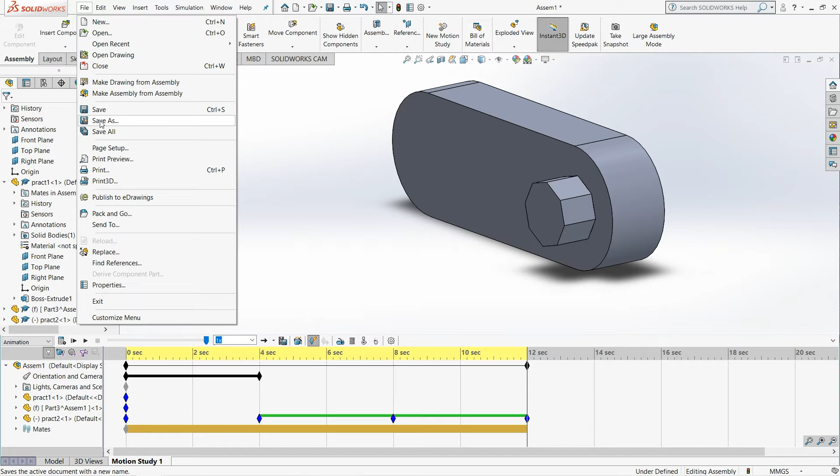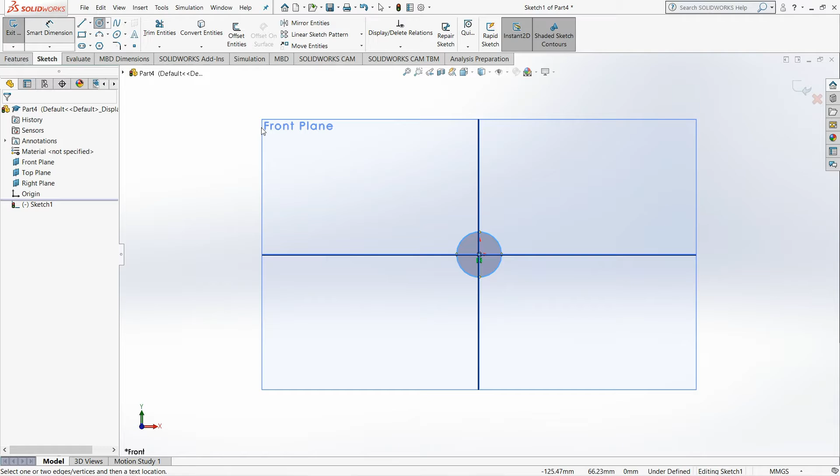Let's make the two parts and make the assembly for the animation. First I will make a base with a hole, then I will make the shaft, and then I will make the assembly with both of them. I am taking some arbitrary values, 5 millimeters for the hole, and I am just taking a base for looking beautiful with any dimension. My goal is to show you how to make a simple animation of a hole and shaft, like how a shaft inserts into the hole.

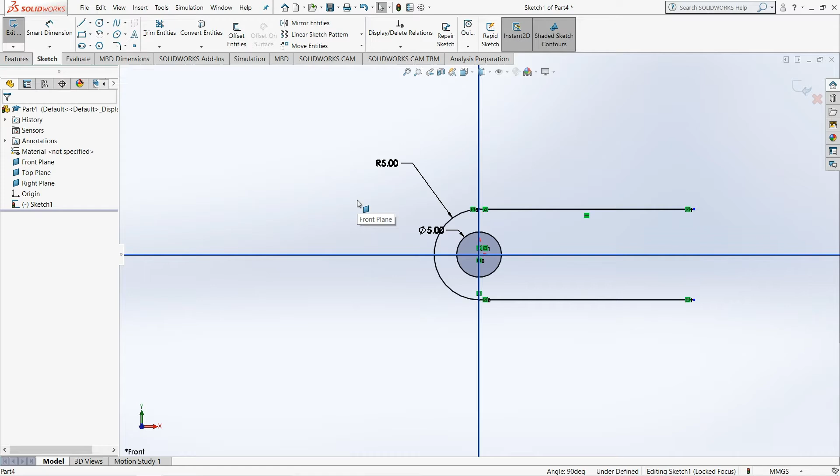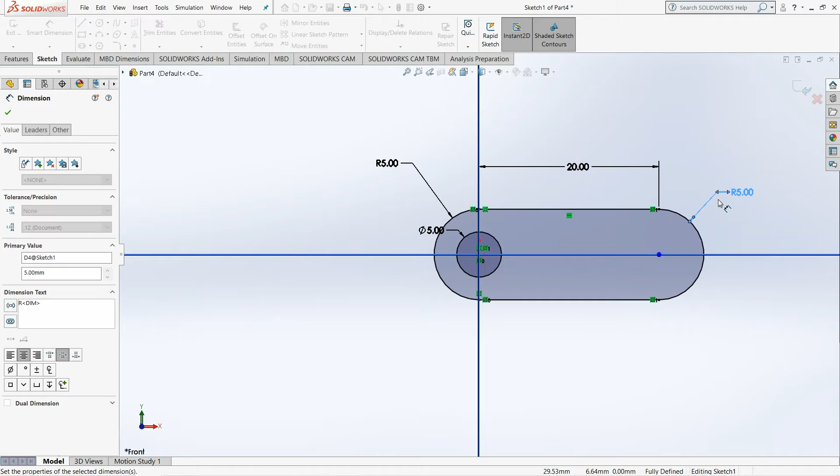Here I am giving the dimensions. I have made it mirror for making things easier. So my sketch is ready, it is fully defined. I can extrude this, I am doing 5 millimeters. So my first part is ready. I give it a name, any name, so I am giving it YouTube part 1.

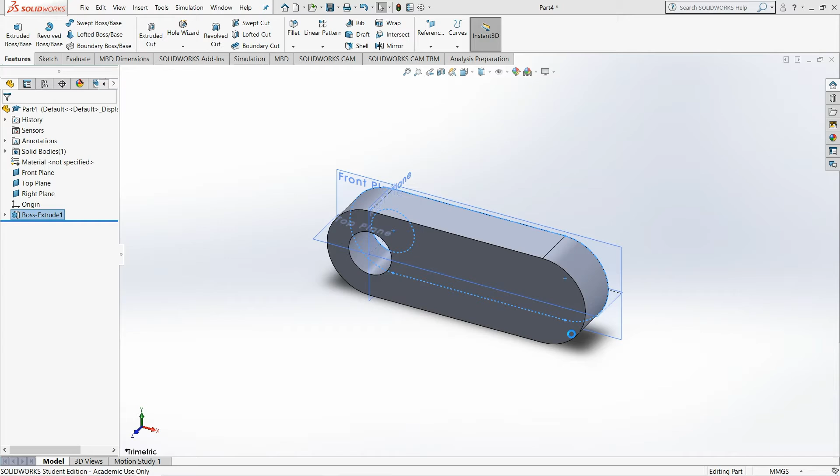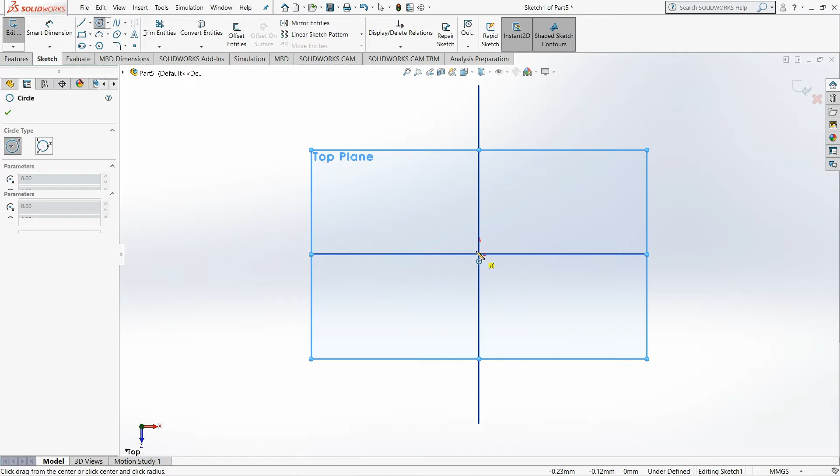Now I will make a new part for the shaft. You can also make bolts and nuts, it's up to you. I am just showing you for making things simple. I can give the threads as well, but I don't want to do them right now, I am making things easy. So the hole and the shaft will be the same size, so I am giving the value the same. Now I am extruding it to 5 also.

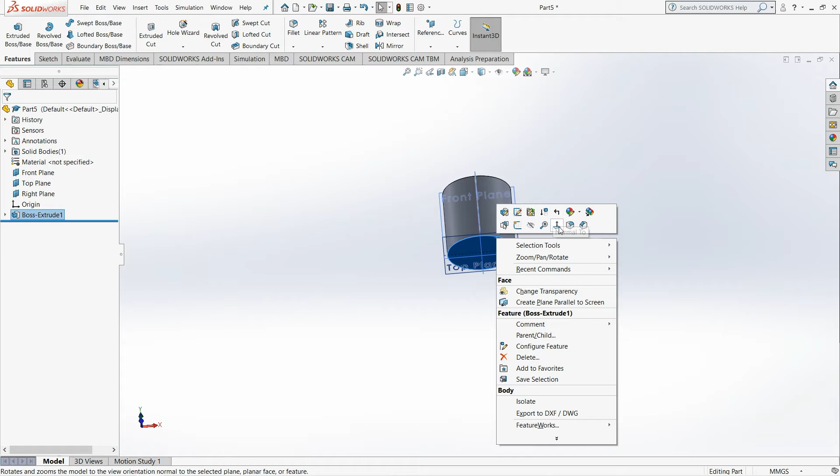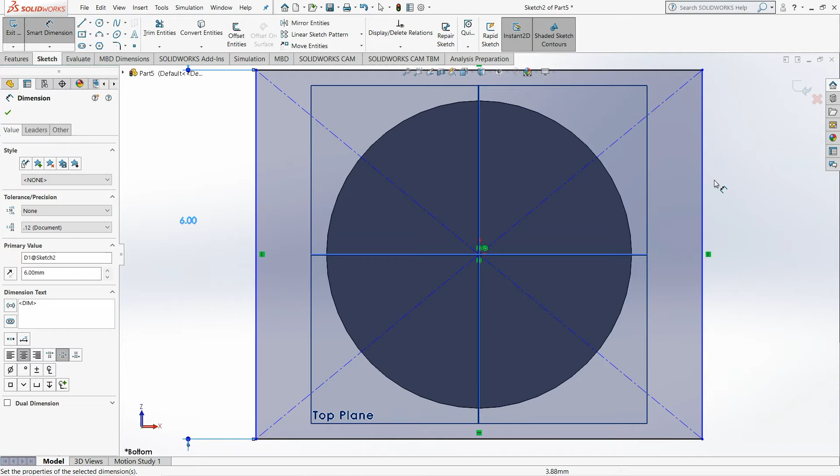Now I will make the head of my shaft. It kind of looks like a nut, but this is not a nut, you know, this is just for a simple animation. I'm doing some chamfer to make the head look beautiful.

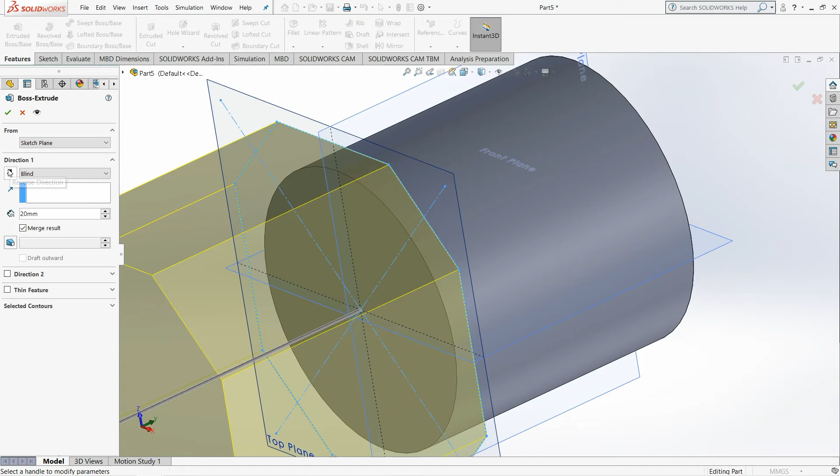Okay, my part number 2 is also ready. I am saving it as YouTube part 2.

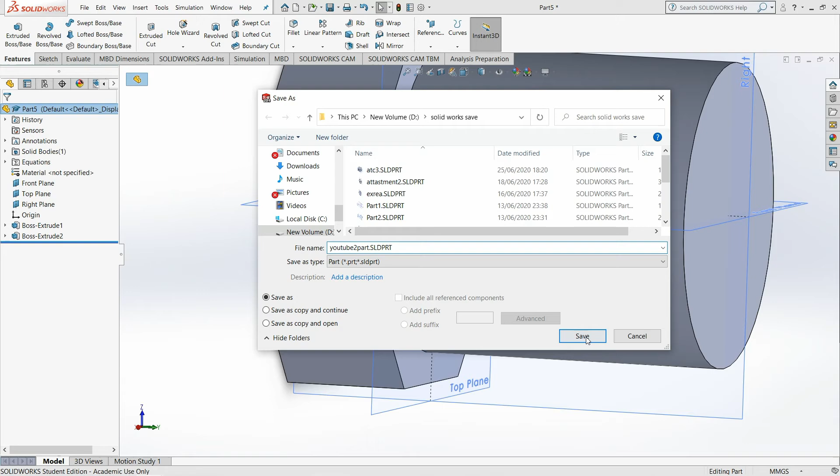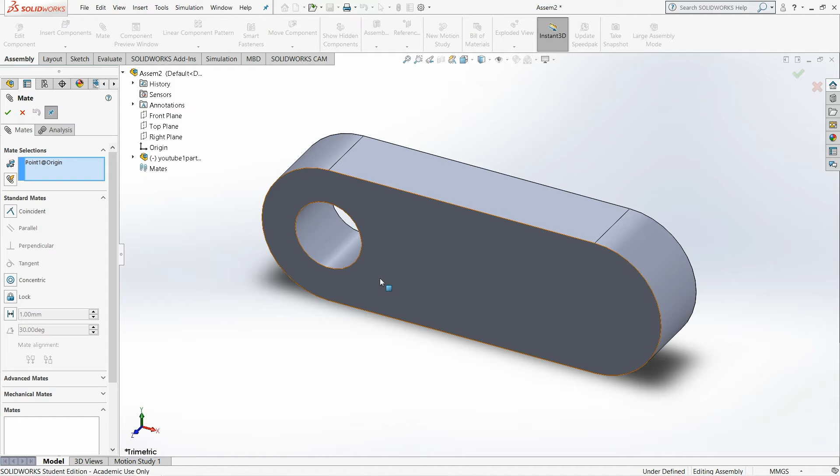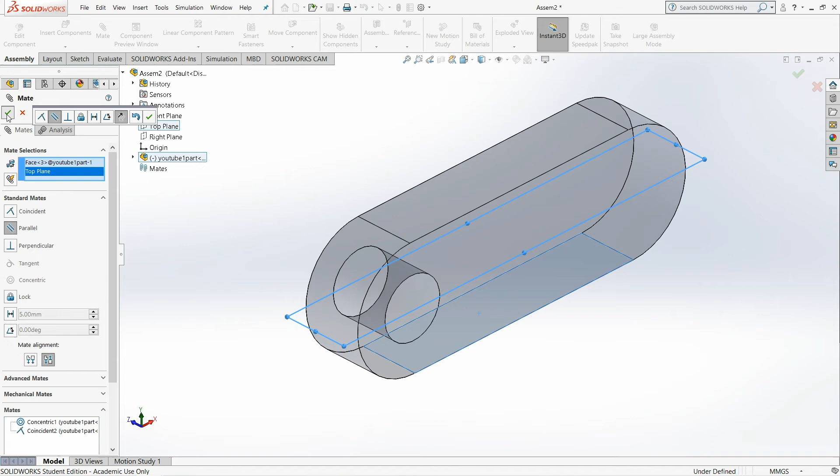Now I will do the assembly. For assembly I need to insert those components. The first part is fixed, so I need to make it float for moving it easily. Now I will make it fully defined as I want, like I will make some mates with its surfaces. See how I do it, you can do it your own way, it's up to you. These mates are really important for assembly. I think this is fully defined now.

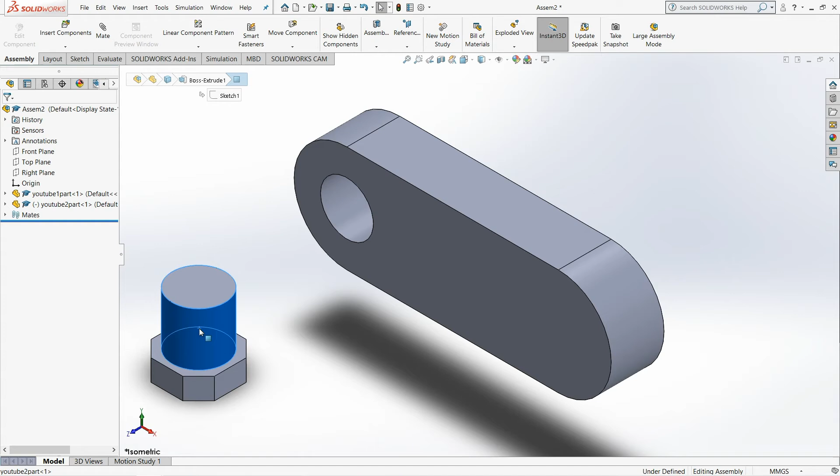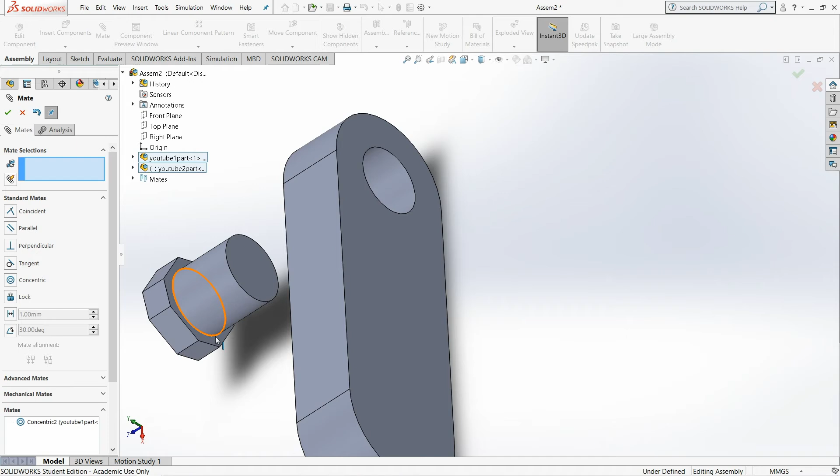Okay, I will insert the shaft now. Now I will mate the cylinder with the hole, see how I do them. If I do only this, it will go through, but I don't want this to go through, so I will make another mate with this plane, with this surface, but I will give the advanced mate here because I want it to move.

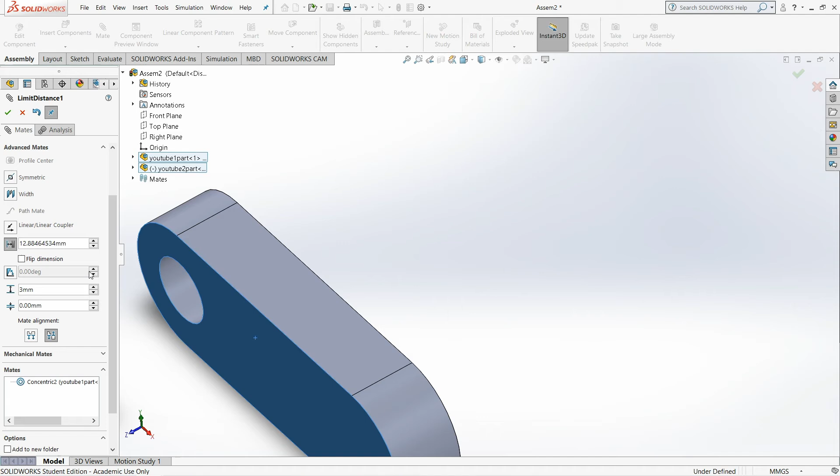So I want those two surfaces to touch each other, so I give the minimum distance 0, and for how it travels, I give another distance of 3. No, I'll give it 6, so it will look beautiful. Okay, but it is not fully defined yet. I can make it fully defined by giving the bolt one surface parallel to the top or front plane. I can do that, but it is not necessary to make the animation.

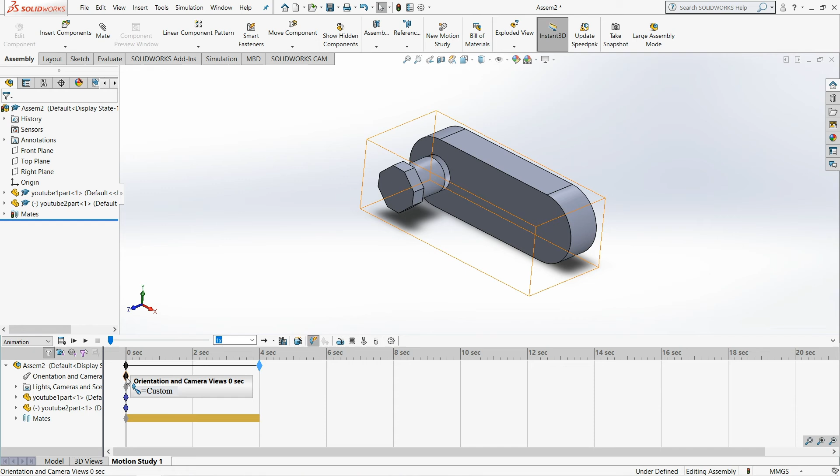Now I will make the animation. Select motion study. Now you can select the time here, like 4 seconds. Now I will make the camera zoom a little bit to make it beautiful. I'll zoom in and zoom out. Then I am making the time longer to show how the shaft goes inside.

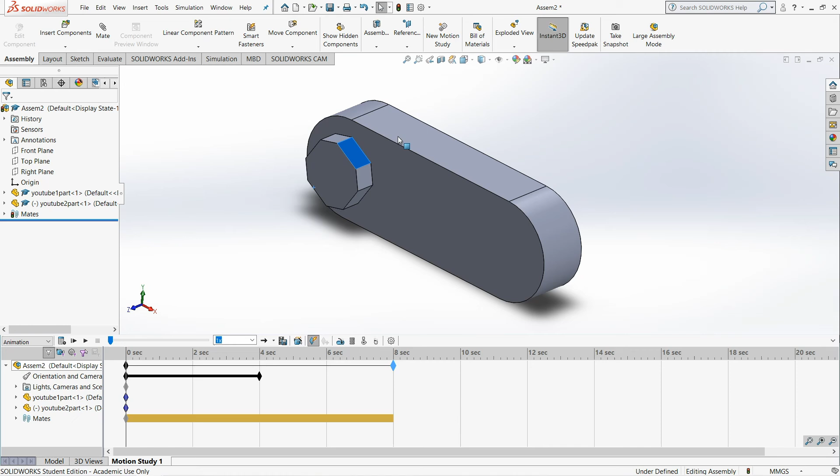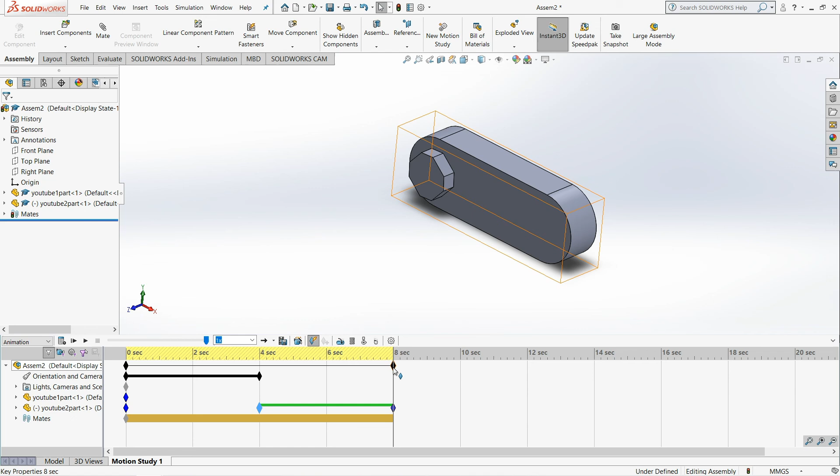Wait, I did not place the key here. I need to place the key, otherwise it will only show the zoom in and zoom out. So for showing the shaft going inside, I need to make the key. Now I am moving it into the middle because in the first half I just want to show the zooming, now I want to show it moving. For making it move, I need to place a key here and make a move. It is done, now see the whole animation.

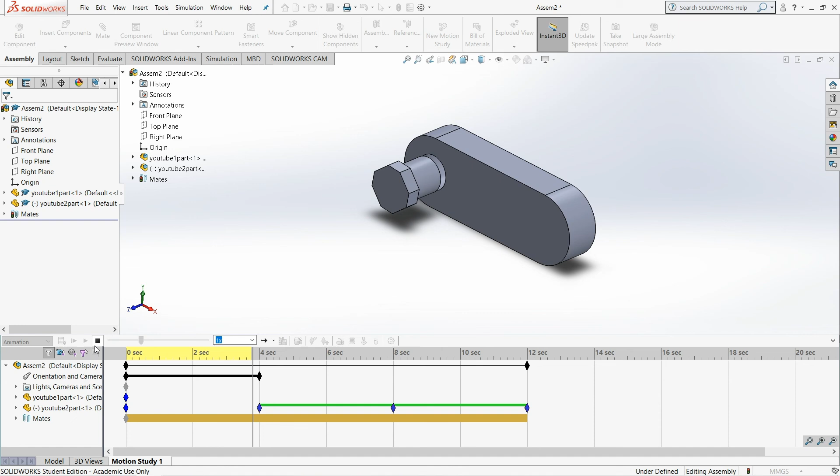So we are done, thank you very much for watching. In the next video I want to make an analyzation of the animation.